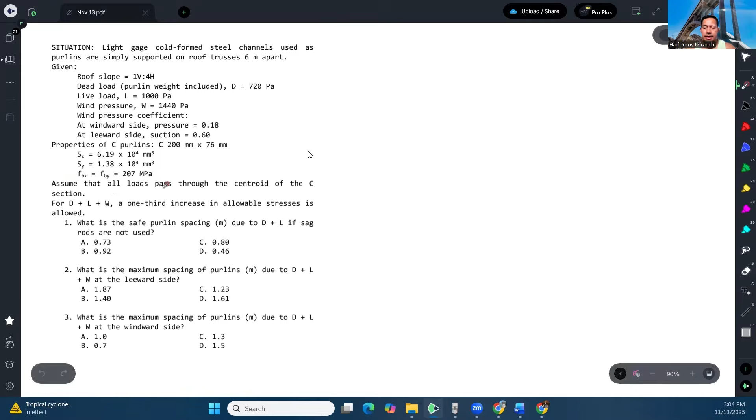The properties of the purlins are as follows: we are given the elastic section modulus, Sx and Sy, and the allowable stresses for bending about X and bending about Y, which is 207 megapascals. Assume that all loads pass through the centroid of the purlin. Later I'll explain the consequence when the load does not pass through the centroid.

For dead plus live plus wind combinations, a one-third increase in the allowable stresses is allowed.

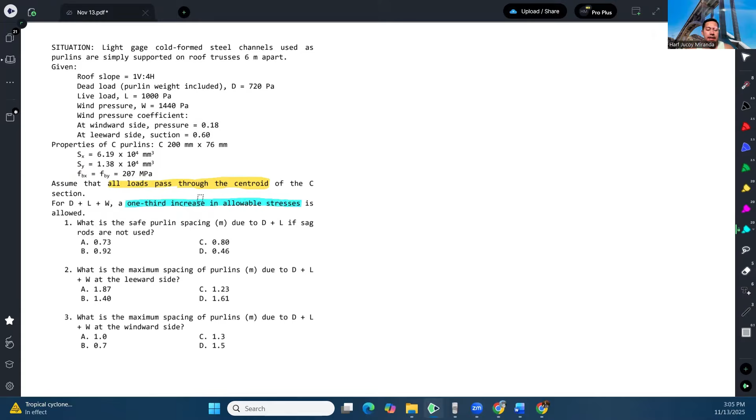So first question: what is the safe purlin spacing due to the dead plus live combination if sag rods are not used? First, let's explain the idealization of how we analyze a purlin.

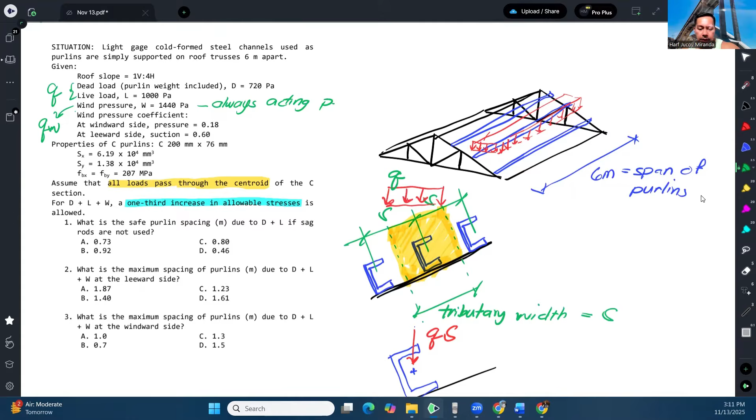Okay, for the wind pressure. Q ng wind, si wind pressure kasi, ang tatandaan natin is yung wind is always acting perpendicular to the member. Palagi yan kapag wind load. So hindi siya kagaya ng gravity load na dead and live na lagi siyang pababa. Ang wind load should be always perpendicular dun sa member.

So ibig sabihin, kung windward, ganito itsura ng wind pressure, perpendicular siya. Kapag naman leeward or suction, pag ganito naman siya. So basta importante, lagi siyang perpendicular dun sa surface ng roof. Okay, yun yung kaibahan niya.

Okay? Pero yung gagamitin natin tributary width kay wind load, isa to pa rin, S pa rin. Kaya ang mangyayari ngayon, kapag wind load, pwedeng ganito. So yung Q ng wind, times coefficient times S. So yung coefficient na to, ito yan.

No, ito yan. Saan na yan? Yan yung wind pressure coefficient. Okay? So depende kung suction or pressure. So ganyan yung magiging itsura.

Okay? So bago tayo magpupunta sa computation mismo, ipaliwanag lang muna natin. So tapos ganito yan. Kapag inisip natin yung channel na to, with respect sa wind load, it will be bending about this axis lang. Kasi di ba yung channel may dalawang axis yan eh. Ito yung x-axis ng channel, tapos ito naman yung y-axis ng channel.

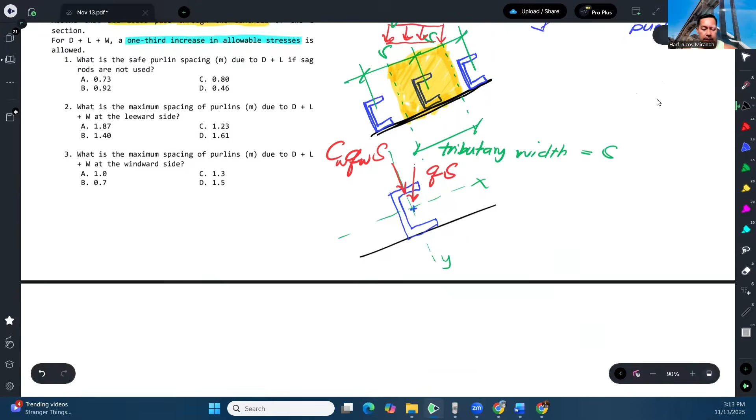So dahil dun sa wind load na acting along y, dito, this channel will bend about x. So ang itsura niyan is parang ganito. Yan yung channel, yung kahabaan niya.

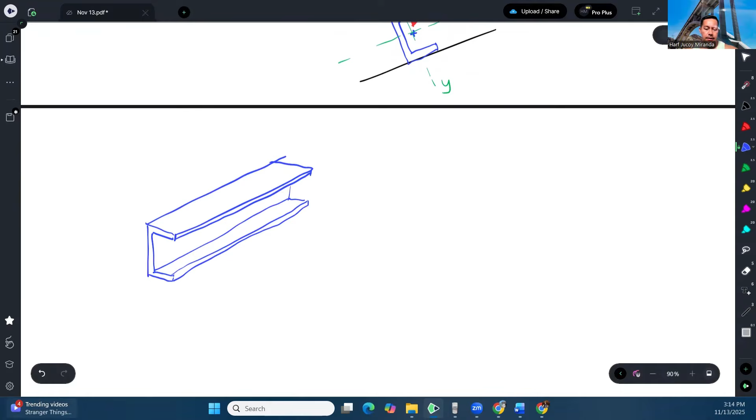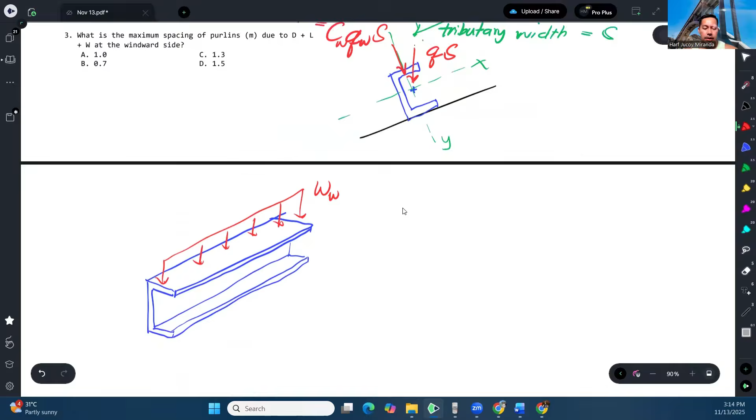Ba ganyan, no? So anong nangyari? Dahil dun sa wind pressure, itong wind pressure na to, siguro tawagin natin itong W ng wind. So yung W ng wind, dito yan mag-a-act. W ng wind, diyan yan mag-a-act. So yung W ng wind will cause bending about this axis.

So dito siya mag-bend about the x-axis, kasi kung ito yung support, simple supports, so mag-bend ito ng pag ganito. Pag ganyan siya mag-bend. So pag ganyan yung bending niya. Okay? So yung bending na yun is bending about the x-axis.

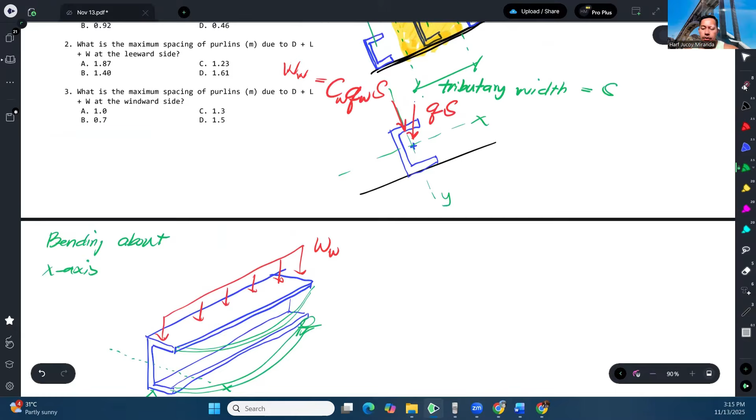Alright? Pero hindi lang yung wind load yung magkakos ng bending about x-axis. Meron kasi itong component, di ba? So tawagin natin to na W ng gravity. Meron kasi itong vertical component or meron siyang component dito. So dahil doon, madadagdagan pa siya.

So ang idea dyan, guys, kung ano itong angle na to, yung angle ng roof, yun din itong angle na to. Okay, kasi ganito yan eh. Di ba, kung meron kang triangle, kung ano tong angle na to, tapos nag-drawing ka ngayon ng perpendicular line, tapos the vertical line, ayan.

So yung vertical, with respect sa vertical, sagad ko na lang dito. So with respect sa vertical, ito yung vertical eh. Bale, ito yung vertical. Yan, yung vertical. Ito yan. Okay? Pag nag-drawing ka ng perpendicular do sa roof na surface, ganito siya. So makapansin natin, pag in-extend mo to, this is 90.

Um, okay, so this is 90, di ba? Ayan. That is 90. So ito, magiging 90 minus theta. And then, this is once again 90. 90 yan kasi ano siya eh, perpendicular. Tapos, ito, ano to? So di ba dahil straight line to, dapat pag inad mo tong angle na to, itong angle na to, tsaka itong angle na to, dapat equal sa 180.

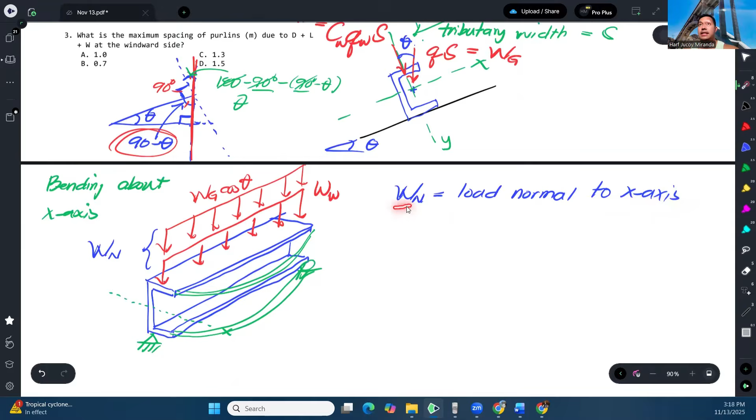Kasi normally, kaya x-axis yung basis natin. Kasi di ba normally kapag meron tayong steel section, usual na bending is a major axis. At yung major axis ng steel section is yung x-axis. Kaya normal to the major axis or x-axis itong W sub n, pag kinombay itong dalawa.

Ngayon, dahil kung mapapansin natin, meron din tayong bending about the, meron ditong X component, papunta dyan. So meron siyang ganyang component, kaya magkakaroon ka rin ng bending about the Y-axis.

Magkakaroon ka rin ng bending about the Y-axis. So mangyayari ganito.

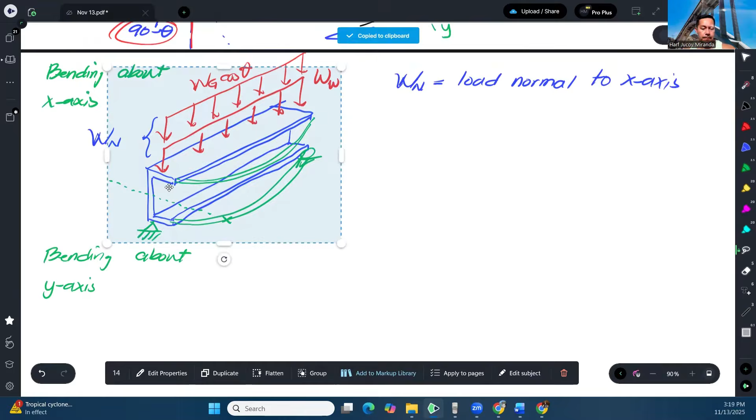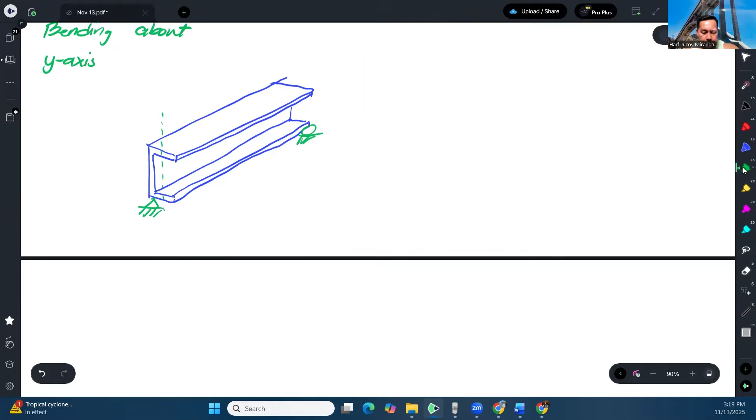Ito naman yung ano natin, try ko na lang muna to. Ito naman yung y-axis natin. Yung x component nitong gravity load papunta doon. Parang magkakaroon tayo ng ganitong loading ngayon.

Magkakaroon tayo ng ganyang loading. Tawagin natin, bali ito yung component nitong WG. As you can see, opposite siya doon sa angle, kaya sine function naman ang gagamitin natin. So this is WG sine of theta. That particular load will cause bending about the y-axis.

Ang mangyayari dun sa purlins natin, magbe-bend naman siya papunta dito, papunta dyan. Magbe-bend siya papunta doon. So we call that bending about the y-axis.

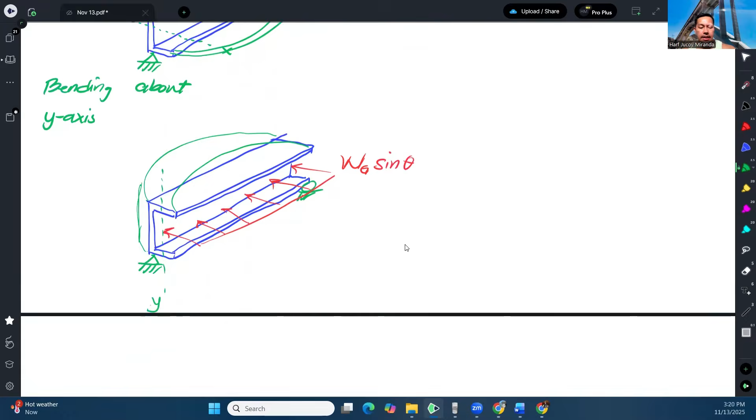Ako naman tinatawag ko ito madalas. Kung ano man yung total na nag-act dito, tinatawag ko naman niya W sub T, or tangential load, tangential to x-axis.

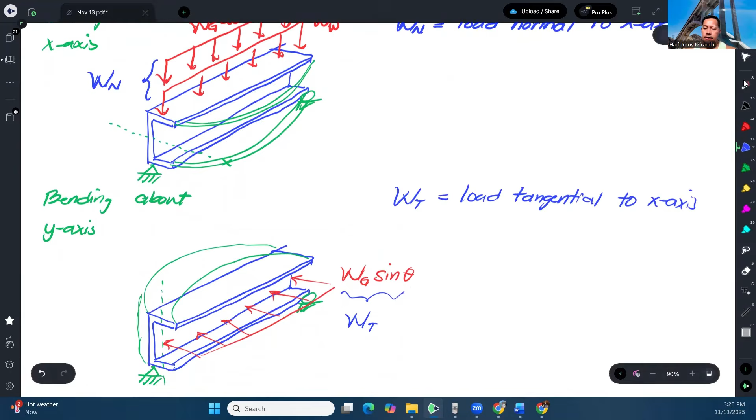W sub T. So yan naman yung magkukos ng bending about the y-axis or sa minor axis. Ito, causes bending about the major axis. Ito, causes bending about the minor axis.

It's all up to us to identify kung ano yung mga load na normal tapos tangential. Pero in a nutshell, parang ang mangyayari lang, itong wind load, palagi yan na normal load. While yung gravity load, meron siyang component na normal tsaka tangential.

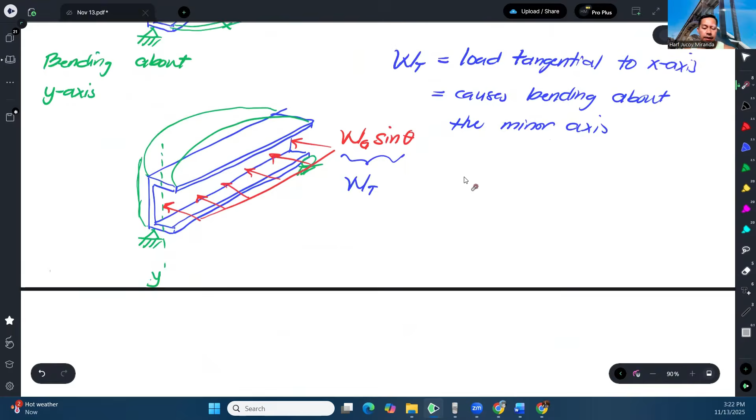Actually yun yung kailangan nating malaman, para ma-evaluate natin if safe yung purlin. Kadalasan ginagamit natin is yung interaction formula o yung computation ng factor of safety.

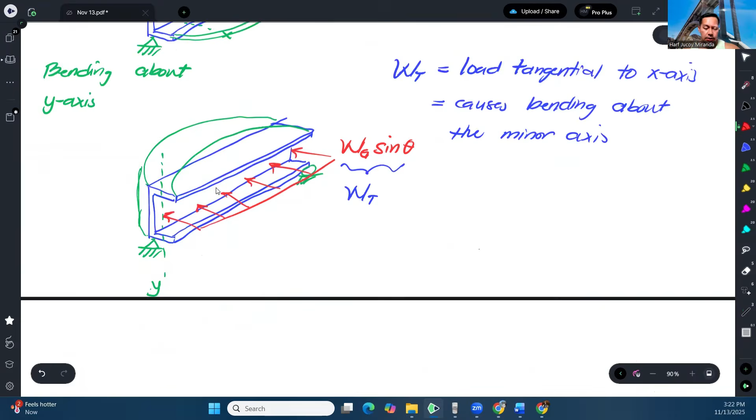To evaluate, sa given, sa allowable stress design dapat ano to, capital F, ibig sabihin allowable. Pag small f kasi ano yan eh, yun yung actual stress. So anyway, to evaluate the safety of our purlins.

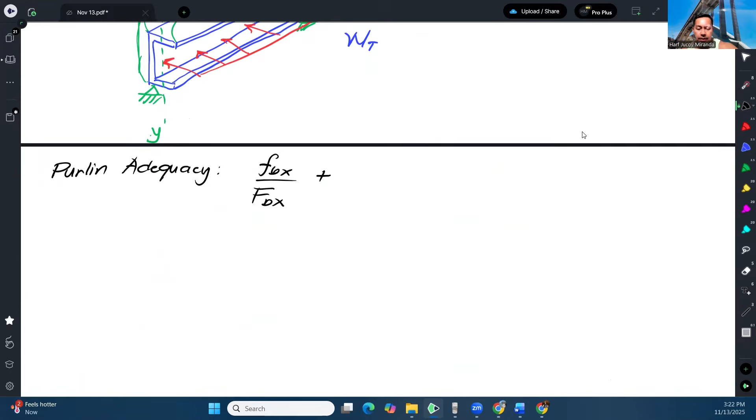Purlin adequacy. Dapat yung actual stress sa X over allowable stress sa X, plus actual stress sa Y over allowable stress sa Y, dapat hindi mag-exceed ng 1. Ibig sabihin safe yan. Yun yung usual na ginagamit natin, according to allowable stress design.

Sa current code natin, NSCP 2015, merong specific na condition na sinusunod. Parang dito rin galing, kaya lang ang sinusunod natin, hindi na stresses, ang kinocompute natin is yung moment. Pero same idea, parang lumalabas actual moment over the moment strength about X. Tapos ito naman, moment about Y over design moment about Y.

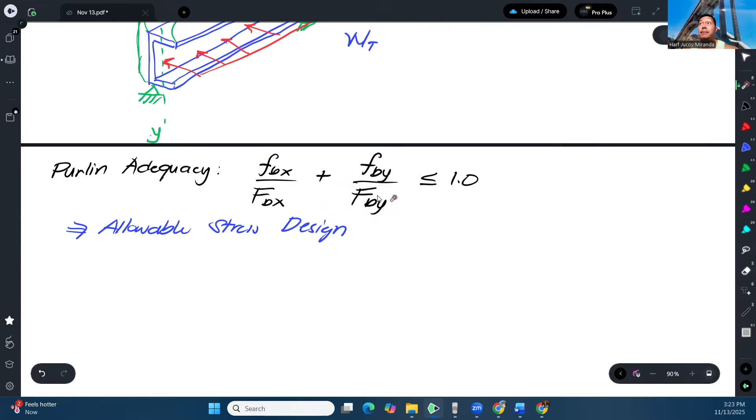Parang ganun, kaya lang dito sa pinag-uusapan natin ngayon, we are adopting allowable stress design, dahil base sa binigay sa atin sa problem, binigyan tayo ng allowable stress. Ibig sabihin, we have to use allowable stress design for this particular problem. So kapag sa allowable stress design, tandaan din natin na wala tayong load factors na ina-apply.

Kaya dito naka-specify lang dead plus live. Hindi natin kailangan maglagay ng 1.2 dead plus 1.6 live. Yan na mismo 'yon, kumbaga i-add na natin directly kapag allowable stress design ang pinag-uusapan.

Anyway, let's start calculating. Ang unang tanong lang, what is the safe purlin spacing due to dead and live? Dead and live lang muna, wag muna natin intindihin yung wind load.

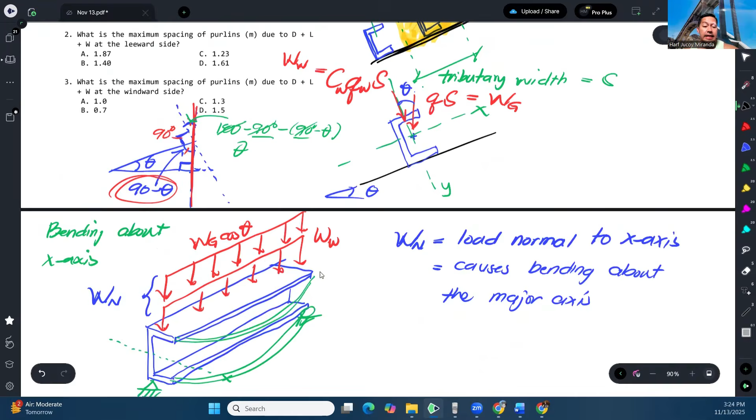So ano yung kailangan na spacing? Spacing ang tinatanong, hindi natin alam yung spacing, di ba? We don't know the spacing. But in analyzing the adequacy of the purlin, kailangan natin makompute kung ano yung magiging gravity load.

So ang load natin sa dead ay equal sa Q ng dead times spacing. Ang Q ng dead is given sa problem na 720 Pascal, or that is also 0.72 kilo Pascal. Sa live load naman, 1,000 Pascal daw, and that is also equal to 1 kilo Pascal.

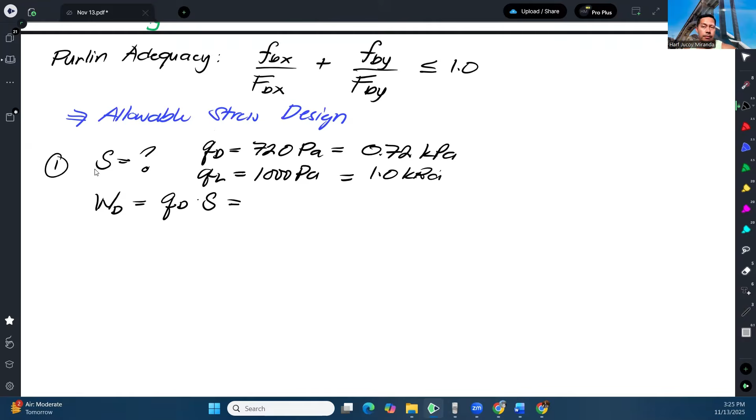Ibig sabihin, yung equivalent uniform load ng dead load ay 0.72 times S. Ang equivalent naman na uniform load ng live ay yung pressure ng live times spacing, which is simply 1 times spacing. So therefore, yung magiging total gravity load natin, which is dead plus live, is going to be 1.72 times the spacing.

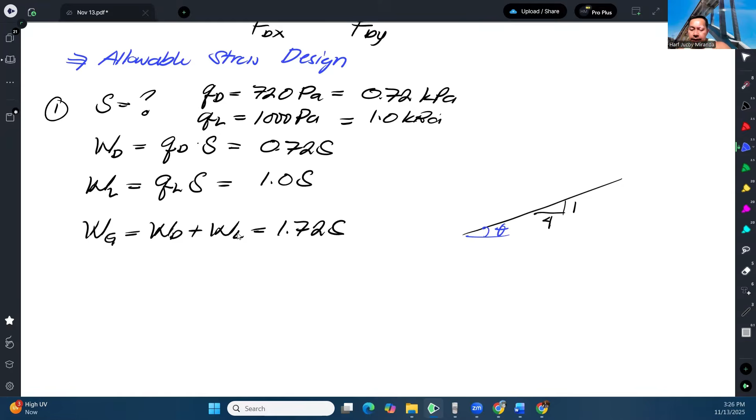Simple as that. Tapos, yung roof natin, nakaslope daw ng 4 horizontal, 1 vertical. So may choice tayo dyan. Pwede natin kunin yung angle na to para ma-define natin yung ano ng purlin, yung purlin natin.

Para ma-define natin kung ano tong angle na to, kasi di ba yung centroid ng purlin nandito, tapos ito kasi magiging direction ng gravity load. So para makuha natin yung tangential at saka normal at saka tangential component nung gravity load. Yung gravity load kasi natin dito mag-act.

Yan yung gravity load natin. As mentioned earlier, kung ano yung theta na, yun din yung theta na to. Pwede natin kunin yun, actually makukuha natin yun using the slope. Di ba ang slope ay tangent of theta, so ang slope is 1/4.

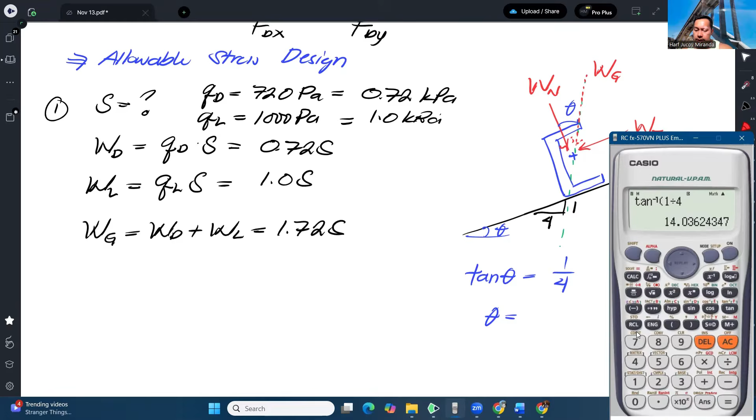So therefore, yung theta natin may be calculated as arctangent of 1/4, and that is 14.036 degrees. So lagyan natin sa A.

Okay, so that means na kapag kukumpute natin yung normal component ng load, that is just yung gravity load times cosine of theta. Tapos yung sa tangential naman, that is the gravity load times sine of theta. Pwede natin ilagay dito 1.72 s cosine of 14.036, tapos 1.72 s sine of 14.036. Yan, so yun yung normal at saka tangential components natin.

And with that, dapat alam natin na yung normal mag-cause ng bending about x. Ibig sabihin, itong WN na to, parang ganito ngayon yung magiging itsura nung purlin natin kapag nakatingin tayo sa bending about x. Parang kapag dito ka nakatingin, ang makikita mo ay ganito, yung purlin. Ito yung flange sa ibabaw, ito yung flange sa ilalim, tapos simple support lang yan.

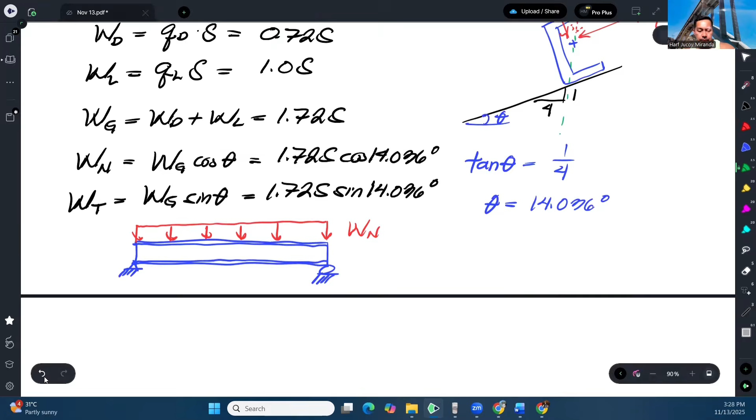Tapos ito ngayon yung tinutukoy natin na normal load, WN. Tapos ito yung span natin na 6 meters. Ulitin ko lang, ito yun, ito yun. Kung ano yung kahabaan ng purlin, kung ano yung distance ng dalawang roof truss, yun na rin yung span ng purlin. So with that, how do I compute the maximum moment?

Di ba ang maximum moment nito, normal, is just W L squared over 8, kasi simply supported lang siya. Okay, so that will give us our moment in the normal axis, or yan din yung, bali ito guys, ito din yung moment natin about the x-axis.

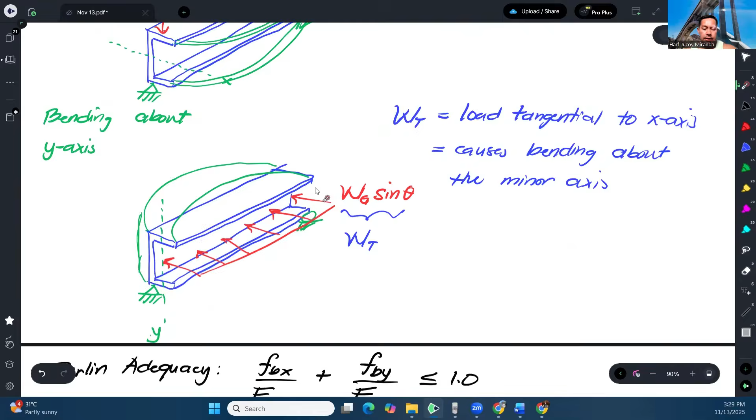Kasi di ba x-axis bending to eh, i-cause nito ay x-axis bending. Ito oh. So x-axis bending i-cause niyan, kaya moment about x din yan. Okay, so that is WN, which is ito.

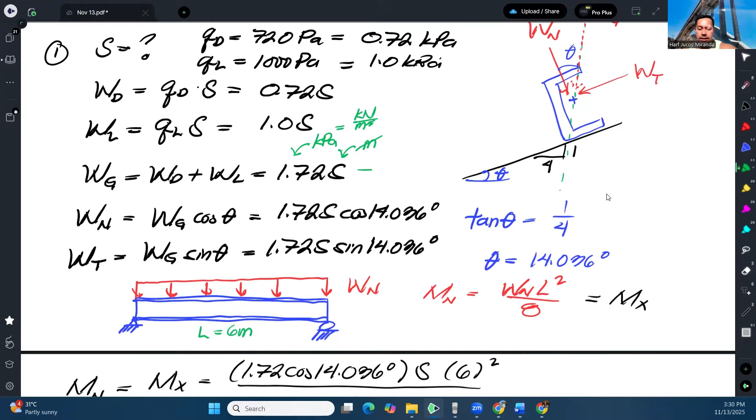Lagay ko na lang, hindi ko na lang muna kukumpitin. S, so WL squared over 8. Okay, assuming na ito ay naka-meter, tapos ito naka kilopascal. Kilopascal is also kilonewton per square meter, so magka-cancel yung isang meter, this is actually in kilonewton per meter. Dahil kilonewton per meter, ito ay meter squared, magka-cancel yung meter, so ang units nito ngayon ay naka-kilonewton meter. Yun yung units niyan.

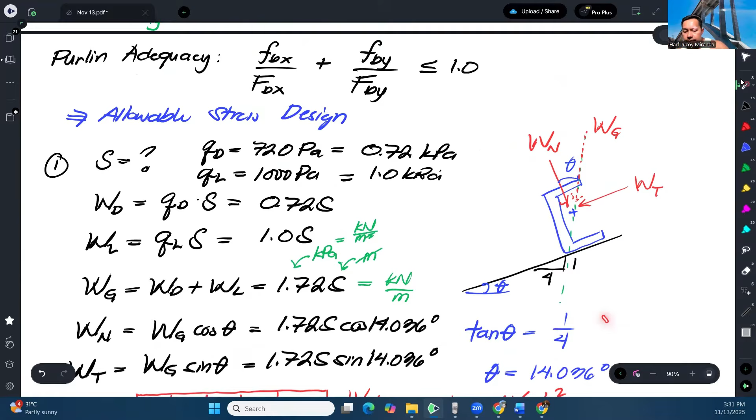So hindi ko na lang muna ulit ko computein. Tapos, makukompute din natin yung moment about the tangential, o yung moment na cause ng tangential axis. Kapag nakatingin naman tayo dito, kunwari dito tayo nakatingin, sa ilalim yan, dyan ka nakatingin, makikita mo yung purlin mo ganito. Ganyan makikita mo sa purlin, tapos ang nakikita mo lang dyan, flange. Tapos, andito ngayon yung WT.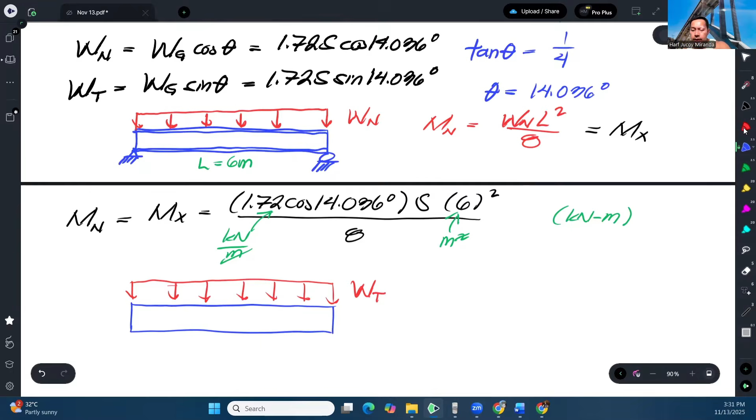Okay, so once again, this is simply supported, and this is 6 meters. So, the moment due to tangential is WT L squared over 8, and that's the moment about the y-axis. Bending about the y-axis is what we'll do here. That's the idea.

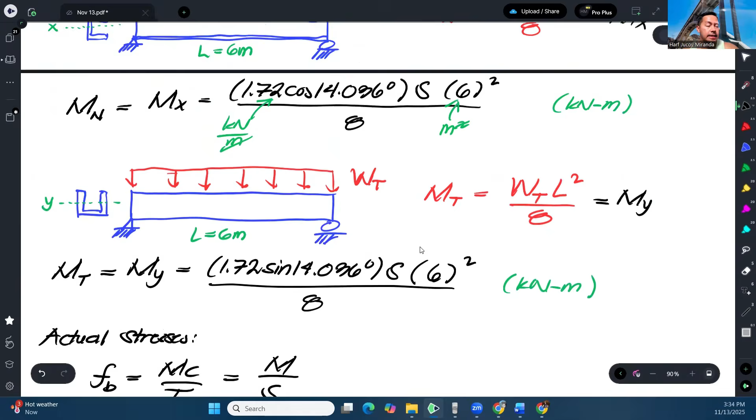The given SX is 6.19 times 10 to the 4th. This time, let's compute everything. I'll highlight just the values and combine them, so that only S remains.

So we will have 1.72 cosine of the angle times 6 squared over 8, times 1 million, over 6.19 times 10 to the 4th. So we get 121.307 S. This is now in megapascal since we converted everything to Newton and millimeter.

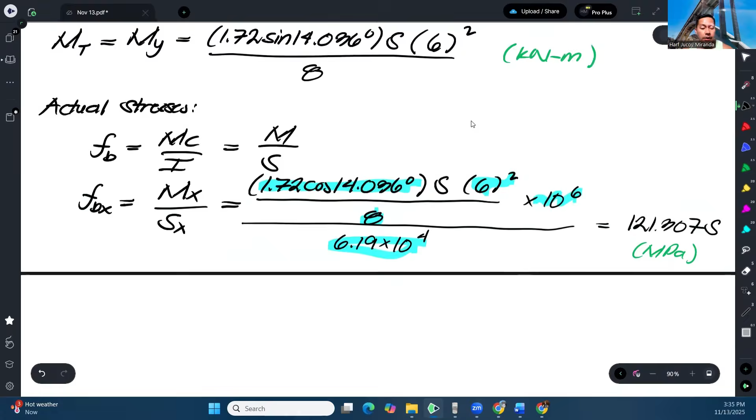For FBY, we'll just repeat the same process, that is MY over S. So guys, the reason I used M over S instead of MC over I is because the given is S. But if the given is I, then of course we'd use MC over I. It's the same thing.

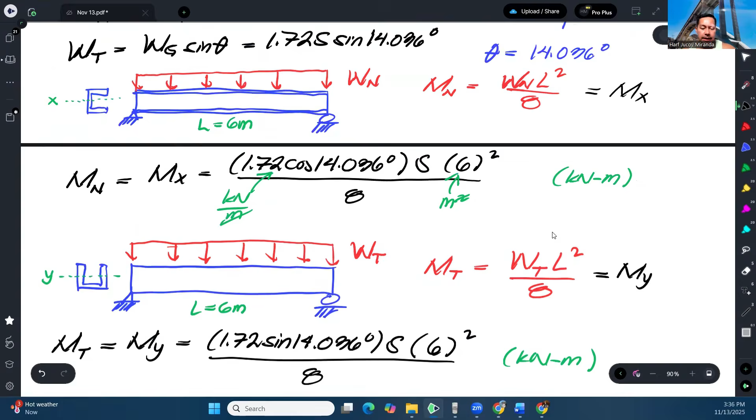So our moment about Y is this. Over, and again we multiply by 1 million so the answer later will be in megapascal. Then our SY is 1.38 times 10 to the 4th. Let's combine these constants again.

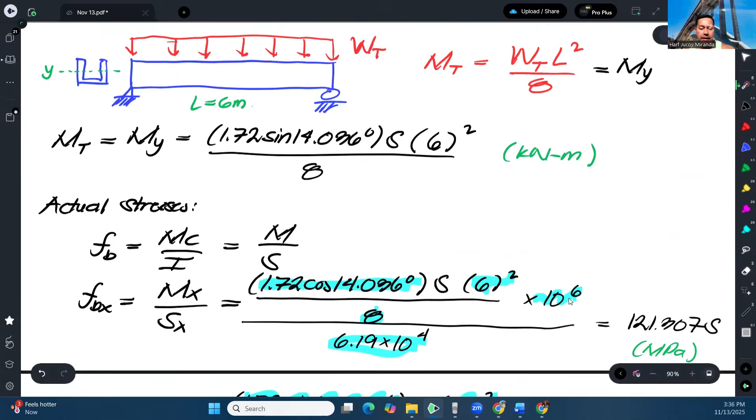Lastly, to solve for the required S, we'll now use this interaction formula. So we will have FBX, which is 121.307 S over our FBX, which was given in the problem as 207.

207, that's the allowable stress. It says here for dead plus live plus wind, a 1/3 increase in the allowable stress is allowed, but we won't apply that now, because for number 1 it's not dead plus live plus wind, it's just dead plus live. So this is not yet applicable. This only applies when wind is involved.

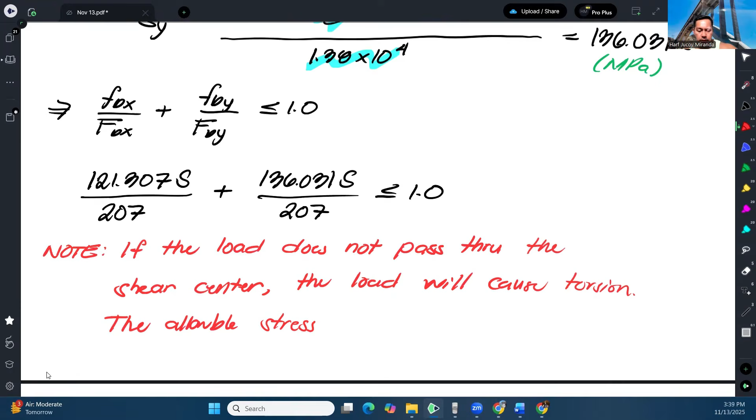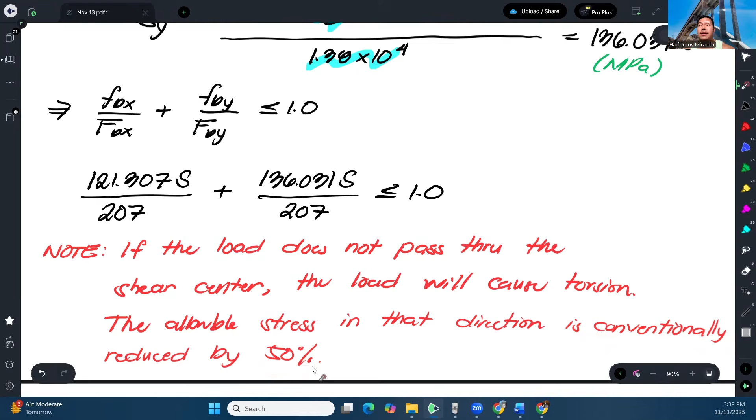Okay? As a mitigation measure, the allowable stress in that direction must be, or is conventionally reduced by 50%. I used the term conventionally kasi itong ginagawa na ito na nire-reduce ng 50%, wala ito sa NSCP. Wala ito sa design code. Ito lang yung nakasanayan na gawin, conventional, ng lahat ng structural engineer.

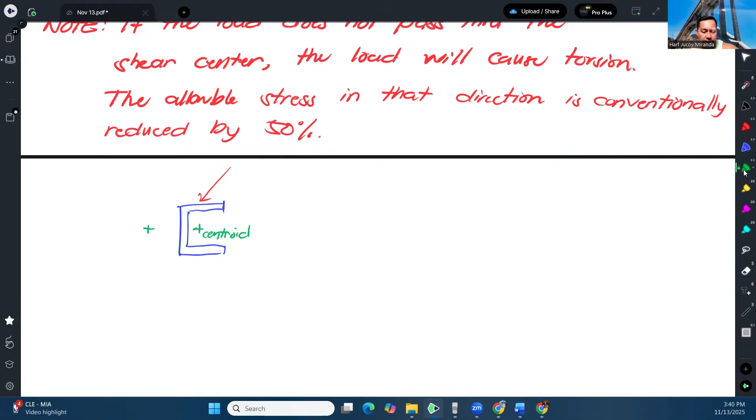Na kapag daw yung load hindi dumaan sa shear center, halimbawa nun ganito, yung channel natin, di ba ganyan? Tapos halimbawa yung load mo nandito lang, nandito nakapatong, nandyan. Actually, ang shear center ng channel, ito kasi yung centroid ng channel, centroid. Ang shear center niya, somewhere dito yan. Kaya ang idea guys, kapag yung load na yun hindi dumaan sa shear center, merong pwedeng mag-cause ng torsion dito sa channel.

Okay? Kaya lang, for the sake of board exam, minsan ini-interchange yung term na shear center at centroid pagdating sa context ng purlins. So kapag tinukoy o sinabi sa problem na centroid, ibig niya na rin sabihin doon shear center. Kaya lang gusto ko lang liwanagin na ang shear center ay iba sa geometric centroid ng shape. Pero for the context of the board exam, pag binanggit na centroid, ang ibig niya na rin sabihin doon shear center. Pero technically, mali yun. Magkaiba kasi yung shear center sa centroid.

Anyhow, so ang idea, kapag hindi ito dumaan dito, mag-cause yan ng torsion. So mayroon siyang additional stress, parang ganun. Kaya ang ginagawa na lang, para hindi na maging meticulous or complicated masyado yung computation, kasi syempre kapag may torsion, mas magiging complicated yung computation natin. So ang ginagawa na lang ay nire-reduce na lang yung stress ng 50%.

Okay? So halimbawa ganyan. So again for the sake ng board exam, let's say yung tinutukoy niya na shear center, ito na rin, kumbaga yung tinutukoy niya na shear center, ito na rin, kunwari lang, no? So ibig sabihin pwede na yung normal component dumaan dyan, so wala siyang torsion. Pwede, pero yung tangential component, hindi siya dadaan dyan. Di ba? So dahil doon, mag-cause ito ng torsion about the bending about y-axis.

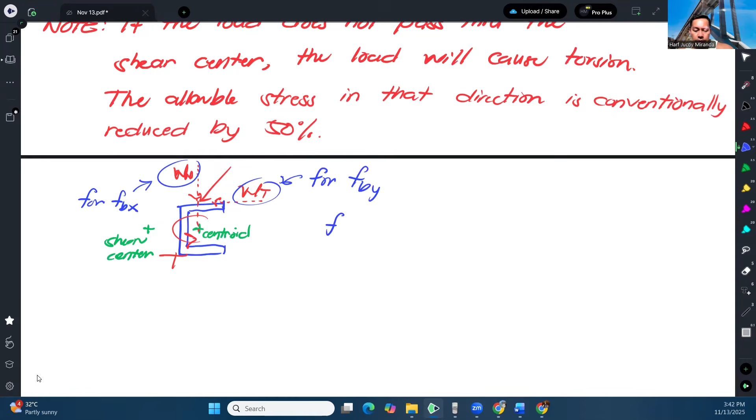Di ba so ito, for ano yan eh, for FBX yan eh. Ito naman, for ano yan, FBY, bending about Y. So ngayon kapag ganyan, yung W sub T na magkakos ng torsion ay dahil nasa direction ng Y, ang mangyayari ngayon sa interaction formula natin, FBX over FBX pa rin to, hindi na i-retain natin siya kasi wala naman to ikakos na torsion. Pero pagdating ngayon sa Y, eto, gagawin natin 1/2.

Magiging ganyan. So ito nga yung sinasabi nito. Yun lang yung magiging consequence kapag yung load hindi magpa-pass through dun sa geometric, dapat kasi technically shear center. Sa ibang klase ng steel section kagaya ng wide flange, kung nasaan guys yung centroid, nandiyan na rin yung shear center. Centroid, yan na rin yung shear center. Yung channel lang yung wala dyan, yung shear center. Anyway, that is just to be more specific. I believe pati yung Z section, yan. Kung nasaan yung centroid, nandun na rin yung shear center. Kaya parang pagbabaliktad siya.

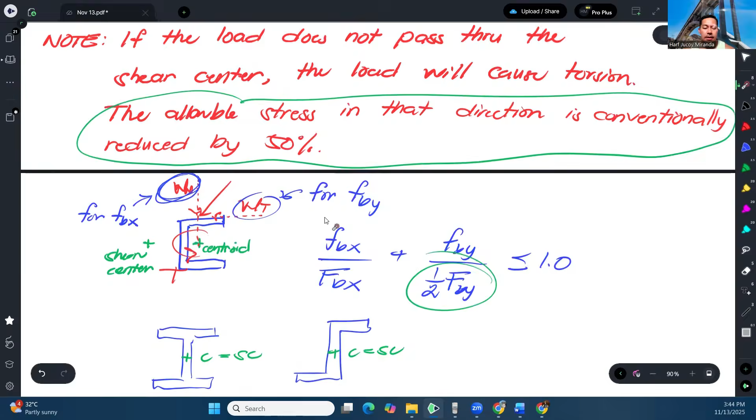Pagdating kasi sa channel, iba eh. Wala diyan yung shear center. But anyway, wag na natin yung intindihin basta ang sinabi naman sa problem na lahat daw ng load pass through the centroid. Again, itong centroid na to, ang ibig niya sabihin diyan na shear center. Okay? So dahil doon, hindi natin to kailangan gawin. So diretso lang tayo na FBX tapos FBY. Kaya dito, dumiretso lang ako na 207. Naintindihan, no? So yun lang yung ibig sabihin nun, na kaya hindi ko na to ginawang one half. Dahil hindi naman mag-cause ng torsion dahil sa problem statement na all loads will pass through the centroid or slash shear center. Okay, so anyway, from here, we can solve for S.

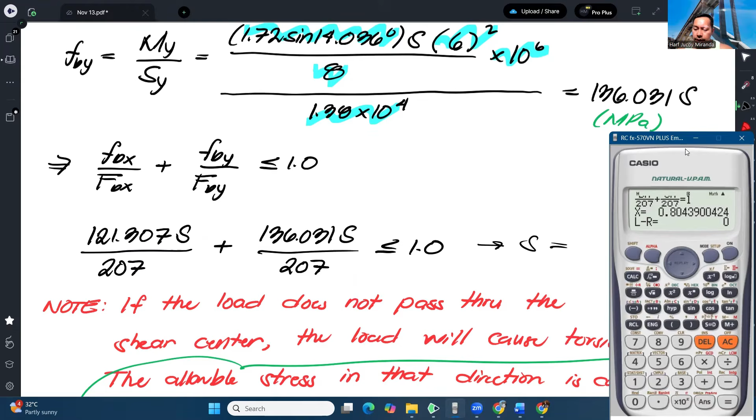So solving for S, we have, bali ito kasi, lagyan natin ito sa B. Tapos ito naman, lagyan natin sa C. So, B x over 207 equals 1. Solve for x. Okay, so x would be, or s would be 0.804 or 0.8.

Okay? So actually, hindi ito equation. Kapag sinolve mo talaga yan ng tama using algebra, so cross multiply mo to doon, tapos i-divide mo to dito, no? Factor out mo yung s. So ang mangyayari talaga dito, dapat ito ay less than or equal. So ibig sabihin, yung spacing natin, hindi pwedeng lumagpas ng 0.804. Pag lumagpas, anong consequence? Pag lumagpas kasi dyan yung spacing, ibig sabihin yung purlins natin masyadong malalayo sa isa't isa. Kapag masyado itong malayo sa isa't isa, magiging malaki yung tributary width. So ibig sabihin, magiging malaki yung area na kakargahin itong purlin na to.

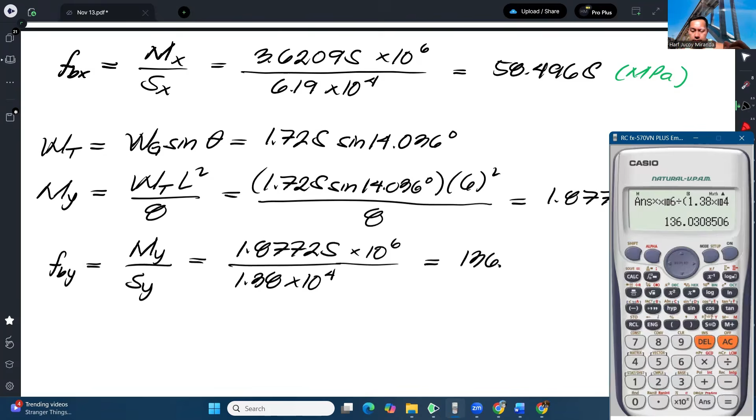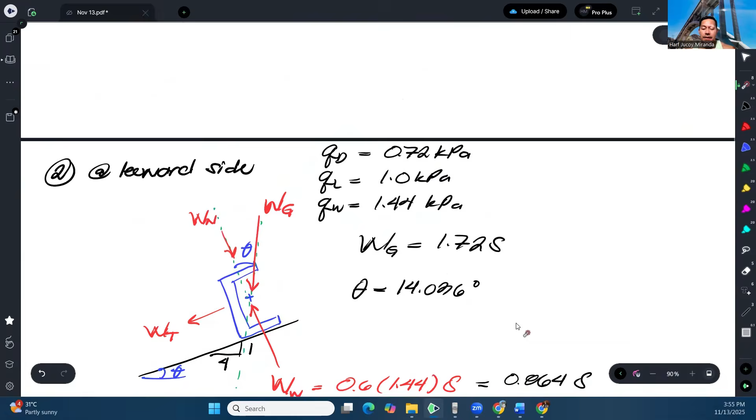Okay, and that gives us 136.031. So actually, same value. Again, this is in megapascals. So if you notice, it's the same as in case 1, dead load plus live load. Kasi pagdating sa tangential component, wala namang effect yung wind load. Wala siyang effect, kaya yun pa rin ang magiging value.

So keep that in mind para mamaya hindi natin yan uulitin. Anyway, pwede na tayo mag-interaction formula. So FBX over FBX plus FBY over FBY.

Okay, kaya lang, sabi sa problem, kapag meron ng wind load, mag-i-increase daw tayo ng 1/3. Actually, kung pilosopo ka, pwede kang hindi mag-increase eh. Kaya sabi niya lang naman, a 1/3 increase in allowable stress is allowed. So pwede daw, pero pwede rin hindi, di ba? Kung pilosopo ka, pwede mong hindi gawin. Kaya lang, bakit niya sinabi yun? Siguro kasi pinapagamit niya.

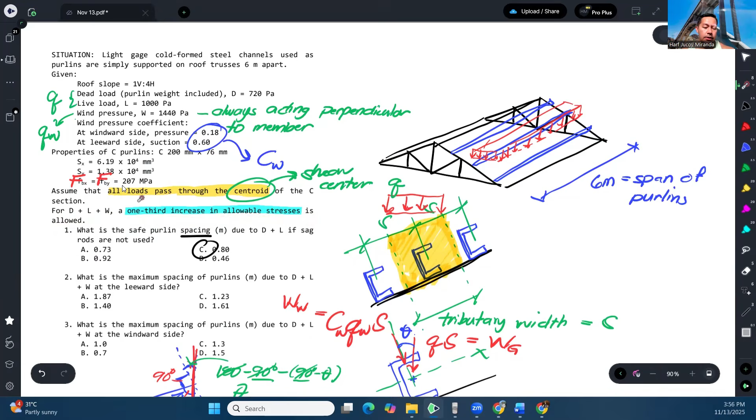So ngayon, dahil pinapagamit na yan, i-increasean natin itong allowable stress ng 1/3. Paano yun? Ang mangyayari, hindi mo i-multiply ito ng 1/3, baka i-multiply nyo ng 1/3 yan, ang mangyayari doon, parang ni-reduce nyo pa, di ba? So yung sinasabi niya is ganito: yung FB, dadagdagan natin ng 1/3 ng FB. Yan yung sinasabi niyang increase. Kaya kapag inadd mo yan, magiging 4/3 ng FB. Ibig sabihin, maglalagay lang tayo dito ng 4/3.

Okay, also important note, dahil alam natin na lahat ng load dadaan sa shear center, hindi natin ito kailangan i-half. Kasi kung halimbawa hindi dumaan sa shear center yung load, magmumultiply pa tayo dito ng 1/2 or ng 50%. Pero ngayon, sinabi niya naman na dadaan, kaya hindi natin yun kailangan gawin.

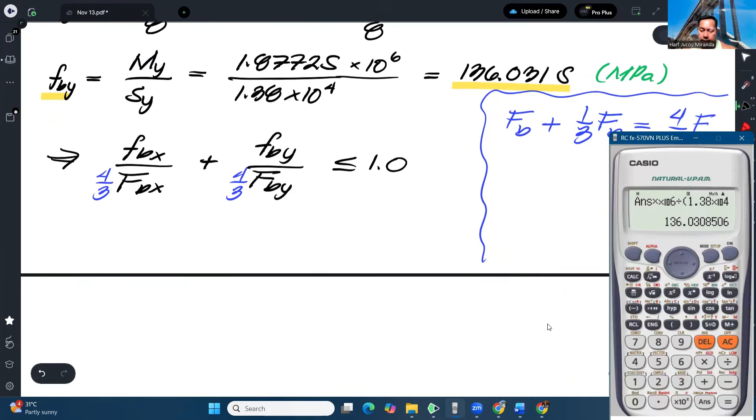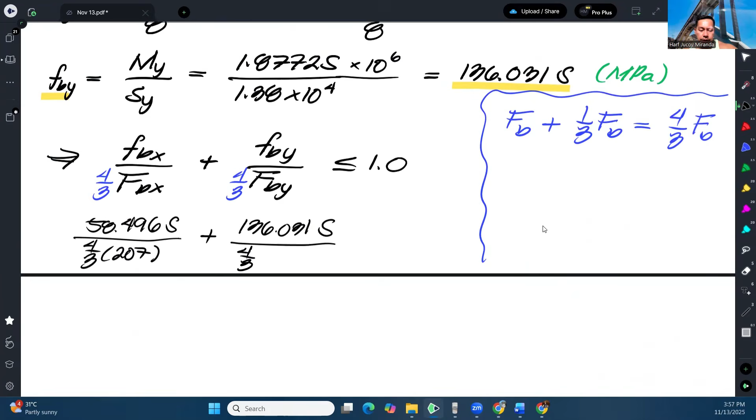So anyway, with all that, we can now plug in all the values. Ito yung value natin, FBX. Ito naman yung FBY, 58.496. O nga pala, ito ay nakalagay na sa C. Okay, so 58.496 S over 4/3 ng 207, plus 136.031 S over 4/3 ng 207 should not exceed 1.

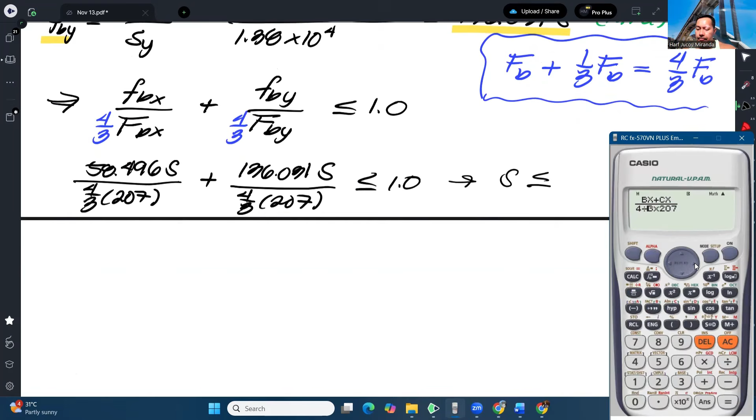So, therefore, the spacing should not exceed... Same lang naman sila ng denominator, kaya pagsamahin ko na. Okay, so solving for spacing, that should be 1.419 meters.

Again, ito nakuha natin ay maximum allowable spacing, 1.419. Ibig sabihin, anything smaller than that is acceptable. So from the choices, the one that is acceptable would be letter B.

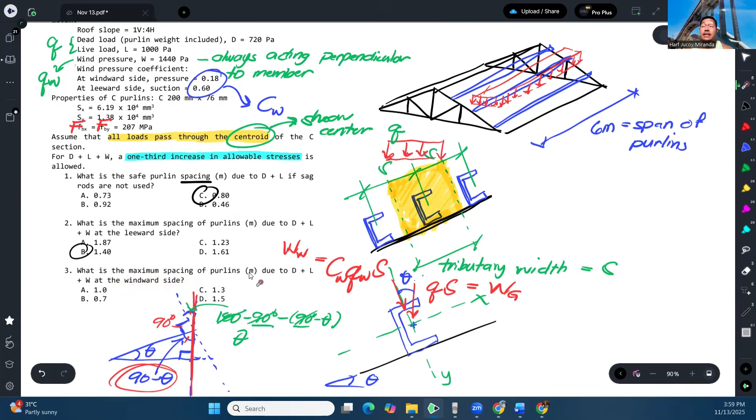Okay, now last question. Ang pinag-iba lang ng last question ay sa windward side naman tayo mag-analyze. Sa part na to, i-adapt lang natin yung ginawa natin sa number 2. Ito pa rin, yan lahat. Ang pinagkaiba lang ngayon, yung value nito, dapat ito ay pababa na kasi windward na siya. Tapos ang value nito, 0.18. Kaya ang gagawin ko, kukopihin ko lang to.

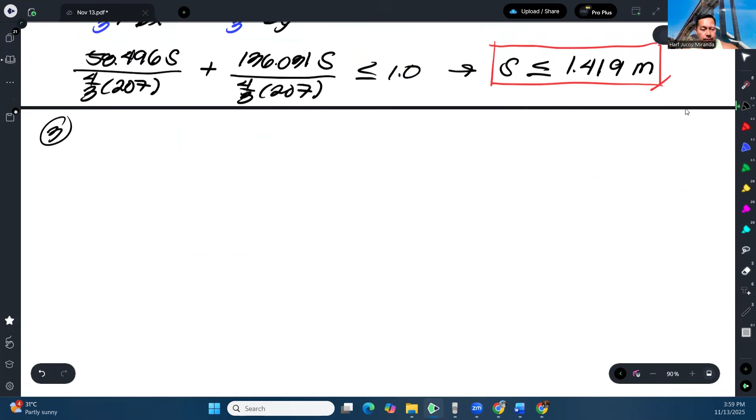Okay, so sa windward side, hindi na dyan nakaturo. Ito na siya, pressure na siya. Okay, tapos ito, hindi na to 0.6, 0.18 na siya. Okay, so iba na ang value nito. So 0.18 of 1.44, that is 0.2592.

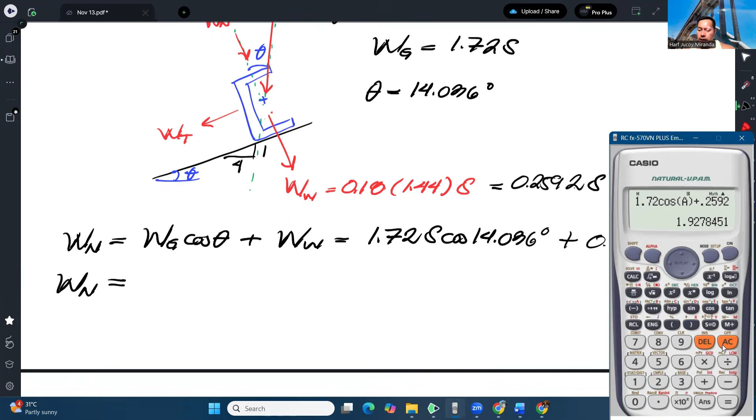And then, pagdating sa W sub N, that is now yung Y component ng dead load plus wind load. Plus na siya, hindi na siya minus. Kaya we have 1.72 S times cosine of 14.036 degrees plus 0.2592 S. So therefore, our normal load would be 1.9278 S.

Okay, and then we can compute our MX, WN L squared over 8. So times 6 squared over 8, so 8.6753 S. This is in kilonewton meter.

Okay, and then lastly, we can compute our FBX, MX over SX. Hindi ko na nasulat yung value, repetition na lang siya nung kanina. So we have this value, multiply natin ng 1 million para maging Newton millimeter, over 6.19 times 10 to the 4. So that gives us our FBX in terms of S, 140.15. So lagay natin to sa B.

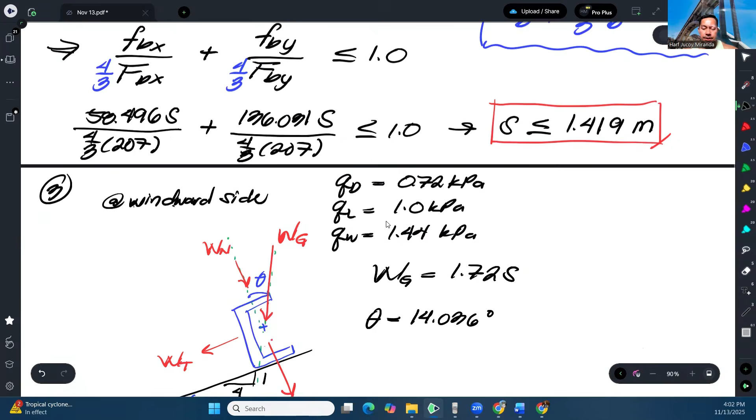Yes, this is already in megapascals. Okay, so again, dahil wala namang effect yung wind load dun sa tangential component, it will turn out na yung FBY natin, same lang kanina, which was 136.031 S.

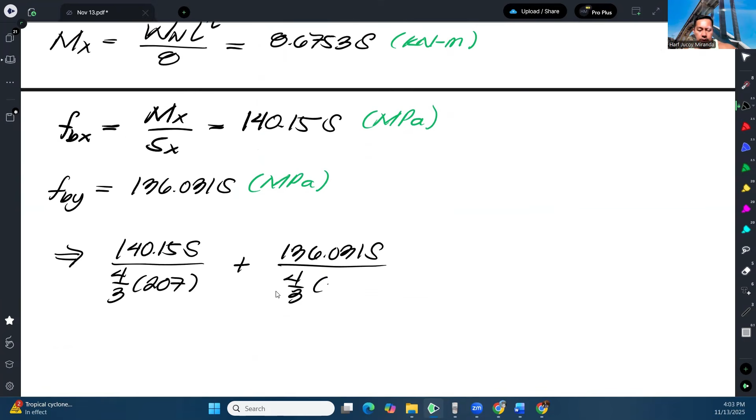And then from there, interaction formula lang ulit. We have 140.15 S over, again i-increasean natin kasi meron na siyang wind load, plus 136.031 S over 4/3 ng 207. Should not exceed 1. So therefore, yung S natin should not exceed...

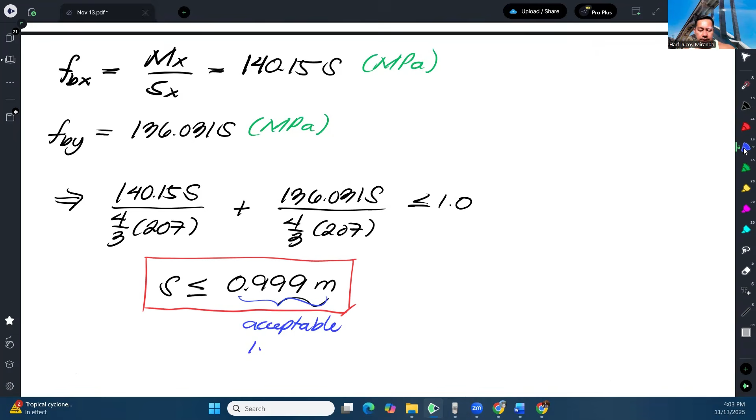Okay, 0.999. Or siguro acceptable na dito yung 1. Acceptable na siguro dito kasi masyado na siyang malapit sa 1. Kaya we can say that the answer, acceptable na yung 1, dahil malapit na naman siya sa 1. So therefore, our answer for number 3 would be 1.

Okay, so that's how we solve this problem.